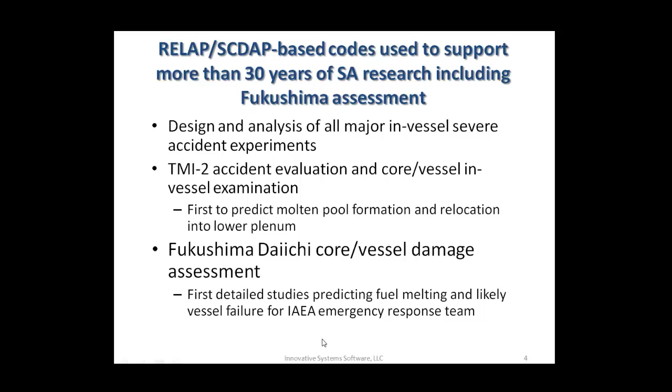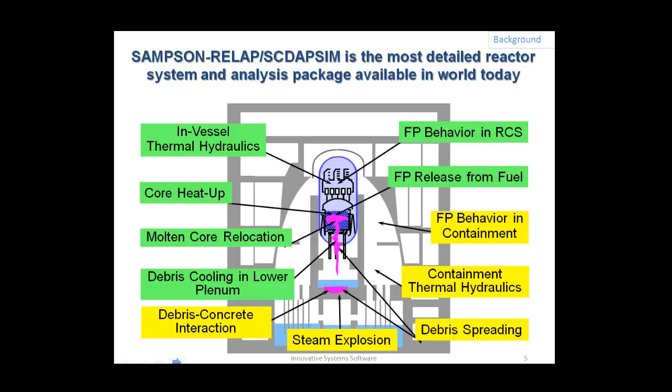Those items shown in yellow are those behavioral processes which are important for the containment response. These codes are being used actively in Japan, and they will play a key role in the Fukushima assessment and cleanup activities. There are a number of activities that we're doing that's associated with Fukushima.

In particular, we will be continuing to assess the state of the core, the vessel, and the containment using a combination of RELAP, SCDAP-SIM, and SAMPSON code modules. We will look at the thermohydraulic boundary conditions and ultimately, hopefully, provide guidance to TEPCO and others so that they can safely remove the damaged core and damaged fuel.

SAMPSON was a very detailed code package that was started in Japan in the 1980s. It was developed for approximately 15 years, and then that work was considered completed, and that software was mothballed. Now that package and that model development activity is underway again by the Japanese government.

In addition to the co-development activities to support Fukushima, we've established a severe accident simulation center at the University of Tokyo, where we're continuing to do model development both on RELAP, SCDAP-SIM, and SAMPSON.

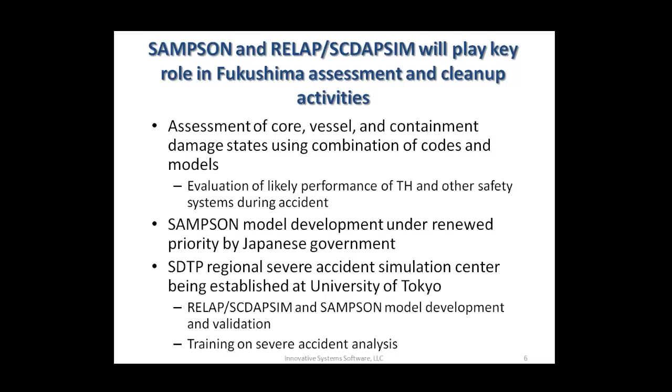One of the questions that we get asked in the development of these very detailed best estimate codes like RELAP, SCDAP, and SAMPSON is, why do we need such detailed best estimate codes? Well, the answers are really fairly simple. Severe accident behavior is complex.

When we talk about the melting of the core during a severe accident, we're really talking about the melting of a very complex system of materials and structures. These materials in the reactor core melt over a very wide range, starting at temperatures as low as 1,000 Kelvin and as high as 3,000 Kelvin.

The lowest melting temperatures in typical reactors are silver, indium, cadmium control elements. They are the first to start melting around 1,000 Kelvin. The last material that starts melting are the ceramic materials, mostly the fuel UO2.

The severe accident behavior is also complex because some things that are somewhat unexpected also occur during a severe accident. In particular, one of the surprising aspects we've learned from many experiments is that the influence of water addition has a very different effect depending upon the state of the core. When peak cladding temperatures are above 1,500 Kelvin, we see accelerated heating and melting. When water is added, once the fuel starts melting, we see very little influence of water addition.

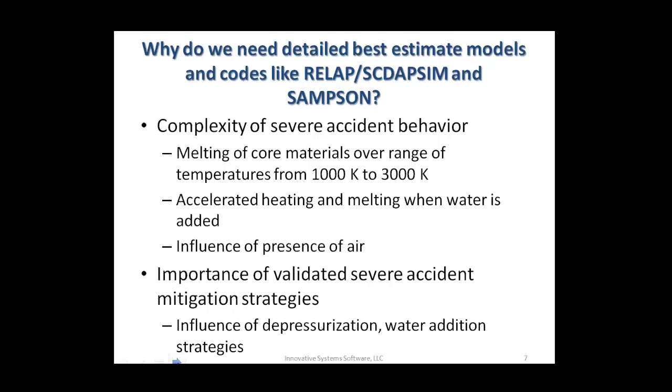So very briefly, I'll just review what we've learned from 30 years of severe accident experiments. Obviously, I can't go into great detail, but let me just tell you about some of the highlights and what we attempt to model precisely with these detailed best estimate codes.

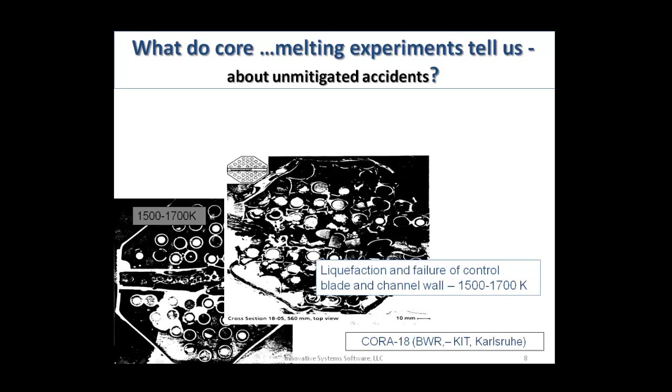As we continue to higher temperatures, at temperatures around starting at 2000 Kelvin, 2000 Kelvin is the melting point of the as-manufactured zircaloy cladding. That material starts to melt around 2000 Kelvin, and then it can start relocating downward in the assembly over a temperature range from 2000 to 2600 Kelvin.

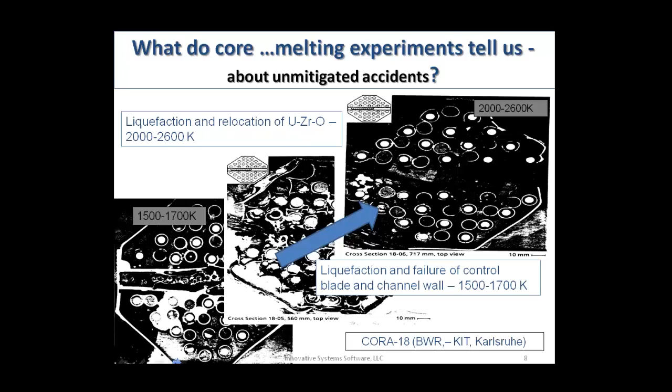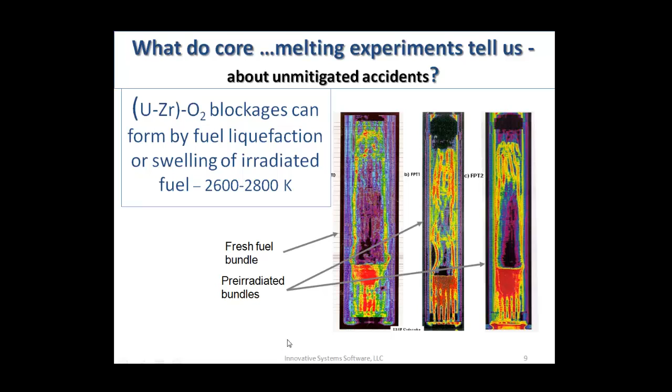I mentioned one of the complex events that was somewhat surprising when we started these experiments in the early 1980s was the influence of water addition. Most of us are familiar with design basis accident analysis, where peak cladding temperatures remain below 1500 Kelvin. Under these conditions, water addition results in the rapid cooling of the core, but as the temperatures go above that, we start to see other responses due to the water addition.

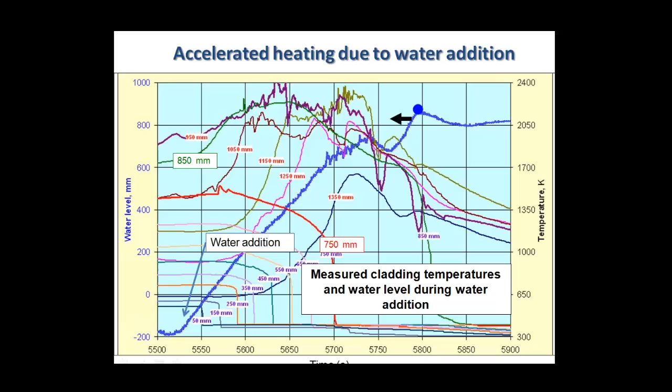So we are producing hydrogen - we are getting some oxidation during the bundle heat up. But as soon as water is being added to the assembly, the hydrogen production and the oxidation, which is producing heat, is causing the temperatures in the bundle to go up.

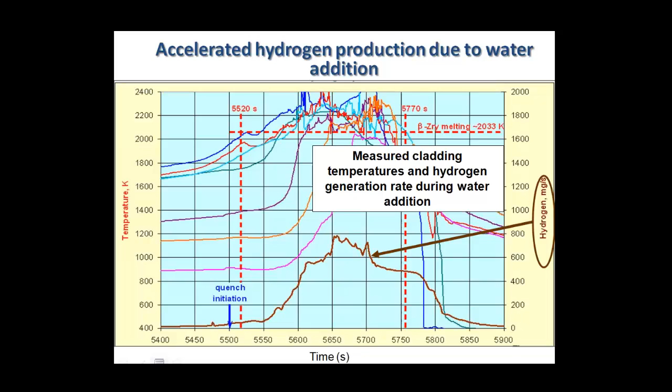So as you can see from a very, very quick summary of 30 years of experiments, there's quite complex behavior that occurs during a severe accident.

All that information is incorporated in detailed best estimate codes like RELAP, SCDAP-SIM, and SAMPSON. It incorporates the knowledge we've gained over 30 years of severe accident experiments, as well as what we've learned from TMI-2. These models and correlations have been widely proven over a series of international validation exercises.

These code packages have been tested in international standard problem exercises. In these exercises, different codes and different analysts participate to attempt to predict experimental results under very carefully controlled conditions. In addition, these models have been used by the international community - by regulatory bodies, research organizations, as well as universities - to support their severe accident and other thermohydraulic research activities.

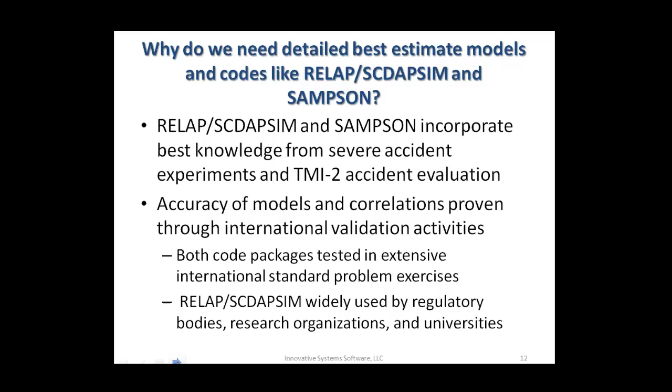One of the other reasons that these detailed best estimate codes are quite useful is that, because they have very detailed models and correlations in the code, they are much more easily scalable from these integral experiments in the existing database to new plant designs and conditions.

These detailed models, fortunately, are much less sensitive to the knowledge and experience of the end users. As a consequence, we've found that analysts who have a good fundamental understanding of basic thermohydraulics, using these detailed best estimate codes, can make quite accurate severe accident simulations, even though they may not have a significant or strong understanding of severe accident behavior.

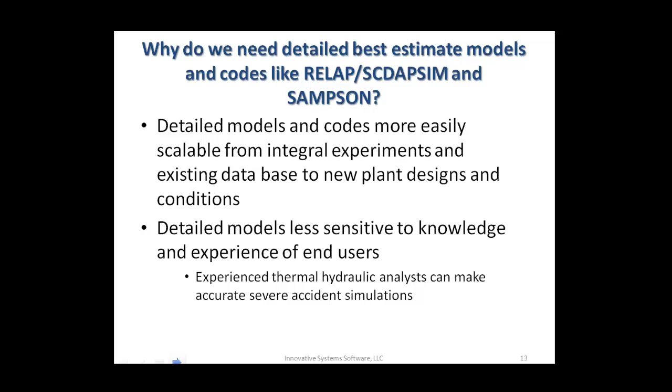There are a number of other codes currently used in the world. There are two basic types: detailed best estimate codes like RELAP, SCDAP-SIM, and SAMPSON, and other widely used codes like MAAP and MELCOR, which are more simplified integral codes.

These simplified integral codes are very useful for safety studies and source term calculations, but we don't consider them good enough for training or assessment of unexpected conditions. The reason is that they intentionally ignore important phenomena in order to maintain simplicity and performance. As a result of these modeling simplifications, these simplified codes rely very strongly upon the experience of the end user and the input model developer.

Thus, these simplified codes actually require a lot more expertise in severe accident behavior, a good understanding of the experiments, for the user trying to do the simulation to do a reasonable job of calculating the severe accident response. MAAP is very

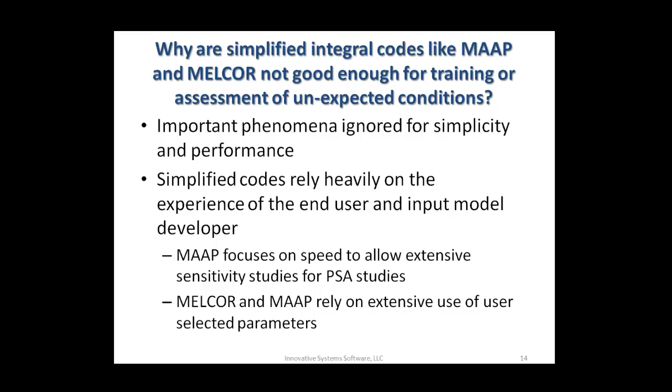successful in terms of its performance standard. It's by far the fastest severe accident code. They have focused their development activities on speed so that they could do very extensive sensitivity studies for PSA, or probabilistic safety studies. Both MELCOR and MAAP rely upon extensive use of user-selected parameters in order to simplify many of the models and correlations in the code.

I'll give you some brief comparisons between these different approaches. On the left of this slide is an example of some of the modeling approaches from RELAP, SCDAP-SIM. For thermohydraulics, we use a quite detailed six-equation non-equilibrium hydrodynamic model. This is kind of a standard set of models for basic system thermohydraulic calculations, widely used in RELAP, TRAC, RETRAN codes, which are widely used in the world for system thermohydraulic calculations.

In RELAP, SCDAP-SIM, we have 2D heat conduction. And if you look at the column on the right, this shows basically the same type of basic model in the MAAP and MELCOR code. So instead of a detailed non-equilibrium thermohydraulic model, they use a quasi-equilibrium hydrodynamic model, which works quite well in boil-off situations, but doesn't always work so well in more complex thermohydraulic conditions, such as the addition of water.

Let me talk a little bit about a very important model. Remember, from experiments we know that the core materials start melting over a very wide range, with temperatures as low as 1,000 Kelvin, as high as 3,000 Kelvin. The reason is you have different materials in the core - structural materials as well as fuel rod materials - and these all have to be tracked and modeled separately if you want to track the relocation of these different materials.

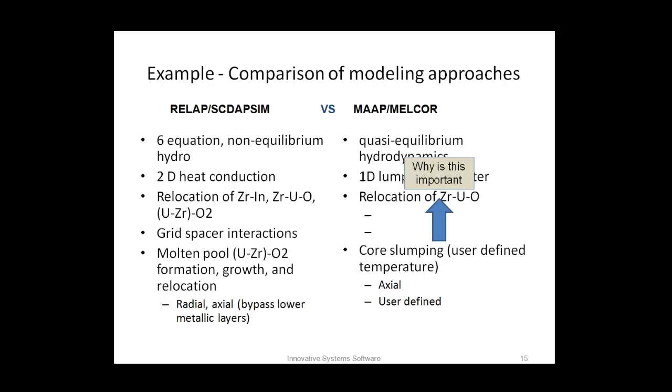Now why is that important? The main reason this is important is because then the user in these simplified codes really determines how and when the core melts down. As a consequence, depending upon what parameters the user selects when setting up their model or simulation, these codes may in some cases significantly underpredict the melt stored energy and the hydrogen production during the heat up and meltdown of the core.

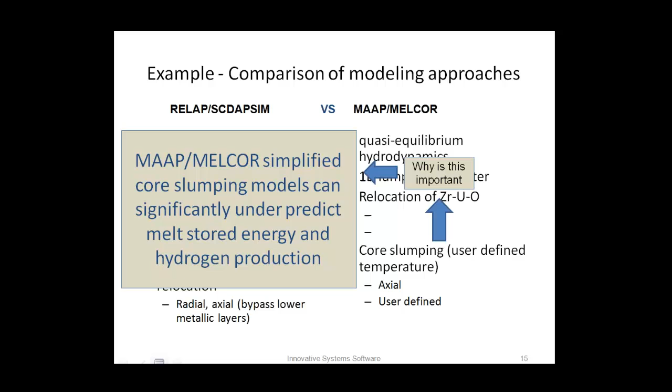Let's talk about the influence of the thermohydraulic conditions as well. In detailed codes like RELAP SCDAP-SIM, the thermohydraulic flow patterns not only depend on things like natural circulation and the temperatures in the reactor coolant system, but also depend upon the state of the reactor core. So flow patterns vary in these detailed codes depending on where blockages are formed or molten pools form. By contrast, in the simplified codes, the flow patterns are hardwired using user-defined geometries.

The addition of water is a very significant one. I showed you the example from one experiment showing the heating of the upper portion of the assembly when water is added. That occurs over and over again in the many experiments that have been performed where water has been added. We see very strongly this accelerated oxidation, heating and melting at temperatures above 1500 Kelvin.

We see as the fuel rod cladding material starts melting around 2000 Kelvin, that molten material can actually oxidize and contribute additional hydrogen and heating to the reactor core. And then as we form large ceramic pools of molten material, we find that the addition of water has relatively limited effect on the cooling of those large ceramic pools.

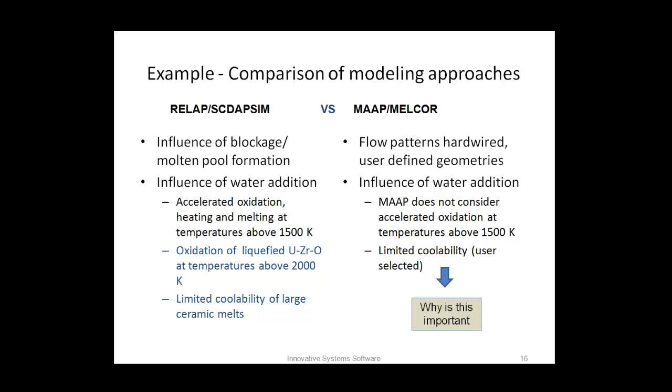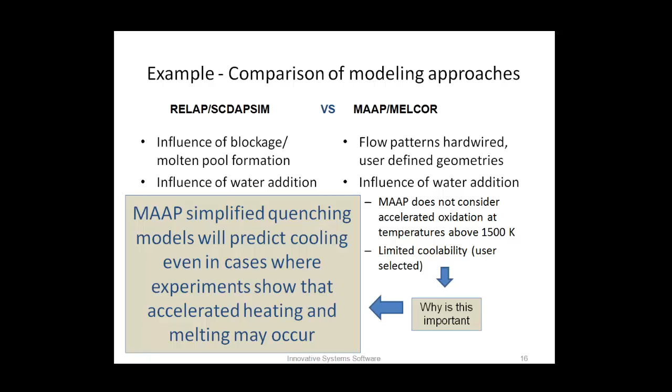Again, why is this important? Well, in the case of MAAP, these simplified quenching models will predict cooling in the core even in cases where a large number of experiments have shown that this accelerated heating and melting may occur.

Another area where there's significant difference between these detailed best estimate codes like SAMPSON or RELAP SCDAP and the simplified codes are those models which describe the retention of debris and melt in the lower plenum of the lower head. I'll give you some examples of the different approaches.

This slide, I'm not going to go through all the details of what's included, I just wanted to make the point that the Japanese SAMPSON in-vessel retention models are by far the most detailed physical models of in-vessel retention available in the world today.

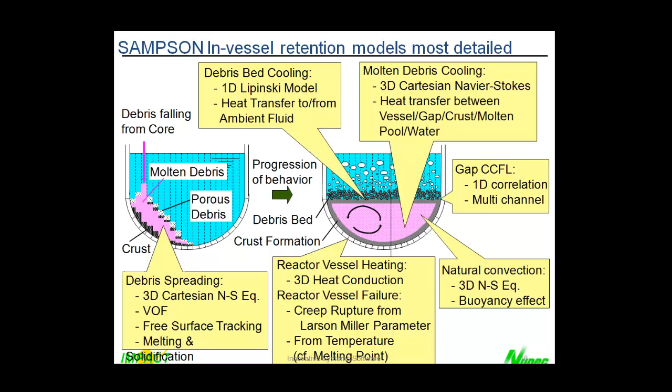They're 3D models. They can track the influence of impingement of the melt on different structures in the core, the addition of water on the outside of the vessel. So they are the models we use if we really need to refine how the lower head will fail. These models, I think, will be very significant in helping the cleanup of Fukushima Daiichi.

The RELAP SCDAP-SIM code also uses a quite detailed model. You can see from this slide it's a detailed two-dimensional model with a quite detailed finite element mesh to predict the behavior of the debris and the lower head.

It predicts the relocation of material into the lower head and how that interacts with the lower head, and also the influence of ex-vessel flooding. It's simplified relative to the SAMPSON code in that it's two-dimensional, so it can only treat an axisymmetric representation of the debris in the lower head.

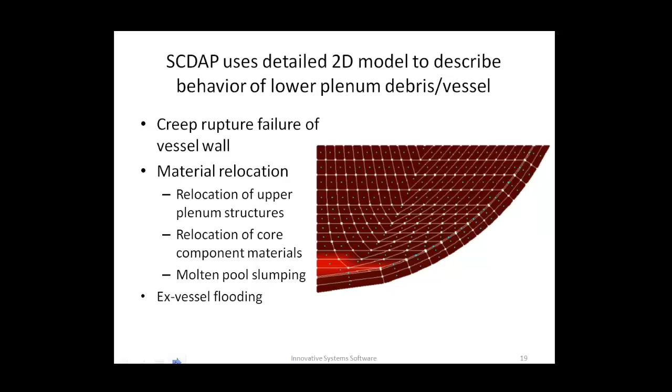By contrast, the Melcor and MAAP models are quite simplified relative to both the RELAP SCDAP-SIM and the SAMPSON package, and as a consequence of these simplifications, as shown in this slide, the coarse nodalization used in Melcor makes it very difficult to give an accurate estimation of the heat transfer from the debris to the vessel wall.

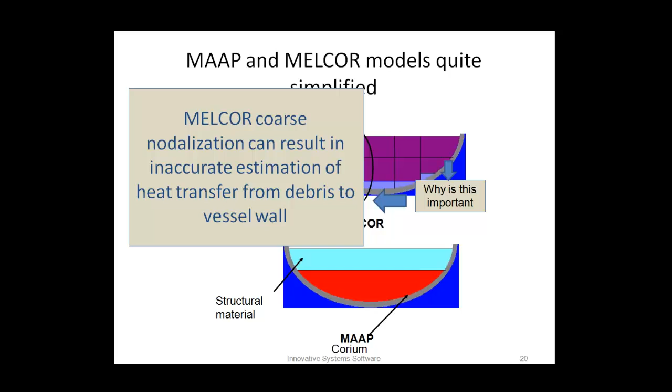A MAAP simplified stratification model is significant in that it can significantly underpredict the heating of the vessel wall if their assumed configuration of the debris in the lower plenum is incorrect.

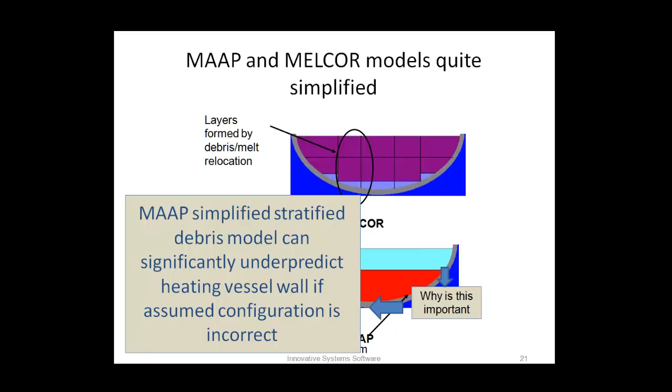One of the really important points I want to make about the use of detailed best estimate codes versus these simplified codes is that the simplified codes make very extensive use of modeling parameters to adjust basic processes. So the user, and the knowledge of the user setting up the models for MAAP and Melcor, really have a very strong influence on the outcome of the calculations.

Because the user has such a strong influence on how the code predicts the state of the core during a severe accident, typical validation approaches where people compare code calculations to data are not really applicable, because users have the freedom to select one set of parameters for one experiment, change those parameters for another experiment, and change them again for the full plant. So these modeling parameters aren't necessarily scalable from the small experiments up to the full plant.

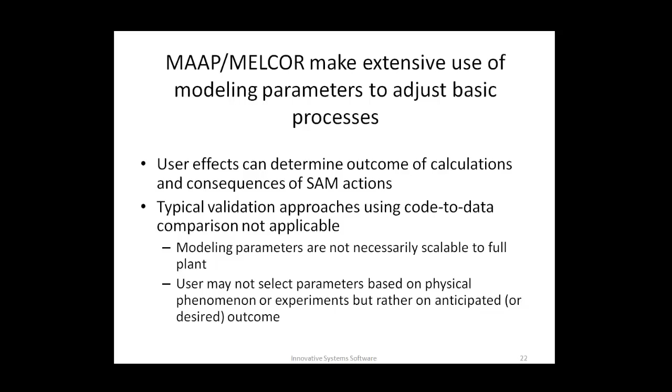Some of these parameters may not be selected based upon physical phenomena or experiments, but unfortunately may be selected by the user because they have a certain desired outcome for their calculational results. So this combination means the user has a very strong impact on the calculational results in the simulation when using these simplified codes.

So to close the presentation, I just want to leave you with the idea that these detailed severe accident codes and models will play a very important role in preventing and mitigating other future severe accidents. We've been working with our colleagues in our cooperative development program to set up regional university-based severe accident training centers so that new nuclear engineers are exposed to accurate severe accident simulation. These detailed codes and models will be helping us over the next few years to fully implement what we're going to learn from Fukushima as they examine the core and the vessel.

And then finally, these detailed best estimate codes, because of computer technology, even though they're quite detailed, can also run significantly faster. So consequently, at many of these severe accident training centers, we have desktop severe accident simulators which can be used to validate full scope simulators with more simplified severe accident models and codes.

So that concludes my formal presentation. I look forward to any questions that you might have, and we can discuss them now.

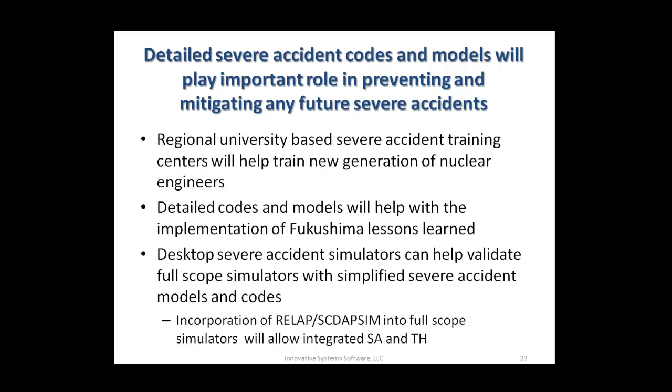We've decided that universities are a good place to implement these training programs, with the idea that we will expose new engineers as they're moving up and first starting out to severe accident simulations, so they understand the consequence of their actions or interactions during a severe accident. One conclusion from Fukushima is that these accidents are very rare, and it's difficult to maintain a high level of expertise, because people who are expert in severe accident behavior, in 20 or 30 years, get promoted, move on, and are replaced by new people. So you continually have to replace that expertise, and we think universities are a good way to ensure a continuous group of people who understand what goes on in severe accidents, and because of that, can not only help prevent them, but in the event they do have a severe accident, are better prepared to help mitigate those accidents.

From the University of Idaho, they want to know approximately how many young engineers under 30 are skilled in RELAP, SCDAP, and severe accident analysis. I don't know the exact number. We have trained over the last 5 or 10 years a lot of students - I would say on the order of maybe 100 to 200 people have been trained in severe accident behavior. So we have a really good start, and we're continuing to work with a lot of universities around the world. We actually have 20-some universities that we work with, and we're seeing more and more students get involved, not only in analysis, but in developing new and better models.